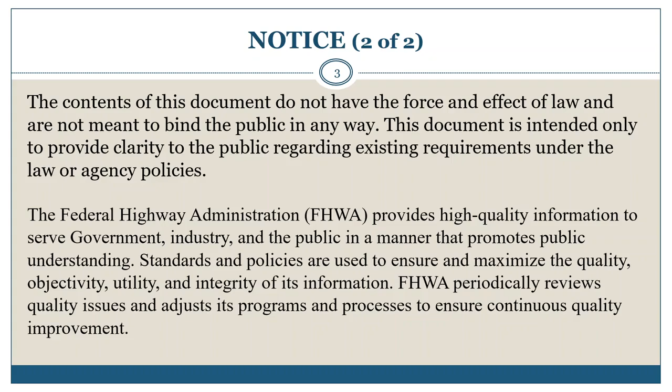The presentation is arranged into 5 sections. The first section is the introduction that will present basic information and definitions on SMA, which includes the background information on SMA mixtures. The second part is a summary of the advancements in design and construction of SMA mixtures, as well as a summary of the performance history of SMA mixtures from their inception into the U.S. The third part is a tie between SMA mixtures and the balanced mixture design process. The fourth part is a tie between SMA mixtures and structural pavement design via mechanistic-empirical design procedures. The fifth and final section is a summary of takeaways from the webinar itself.

Beginning with the introduction.

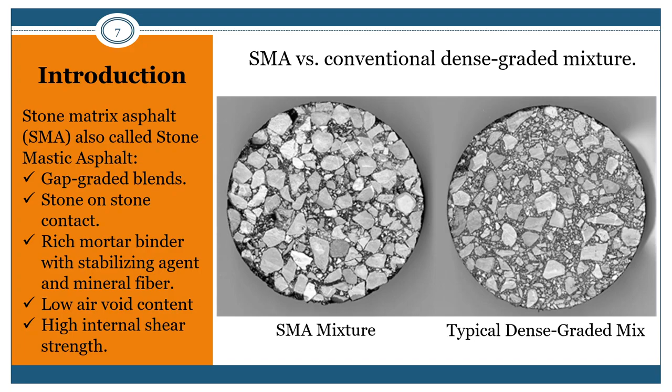SMA mixtures are comprised of 70 to 80% coarse aggregate, 8% to 12% filler, 6 to 7% asphalt binder, 0.3% cellulose, and 0.3 to 0.4% mineral fiber. The cellulose and mineral fiber prevents or reduces asphalt drain down. The higher asphalt content compared to conventional dense graded mixes increases the compliance of the mixture, reducing the probability for thermal cracking, and also increases the resistance to fatigue cracking.

Some use of polymers as stabilizing agents are also included in SMA mixtures, which also increases durability and increases the resistance to cracking and rutting.

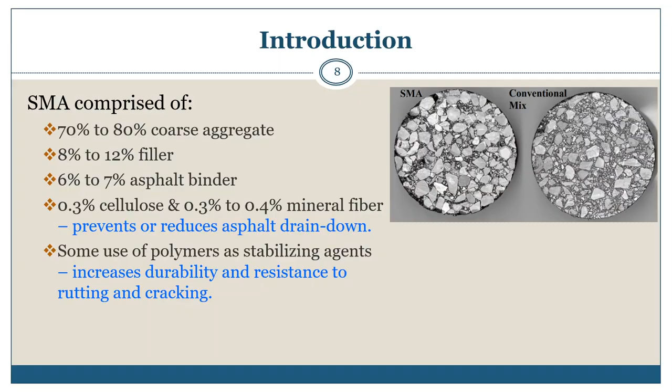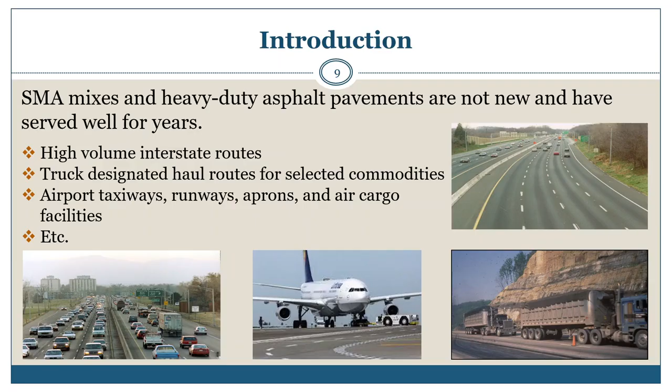SMA mixtures and heavy-duty asphalt pavements are not new and have served well for years. These heavy-duty asphalt pavements where SMA mixtures have been placed have exhibited excellent performance on high-volume interstate routes, truck-designated haul routes for selected commodities, and on various airfield facilities, including taxiways, runways, aprons, and air cargo facilities.

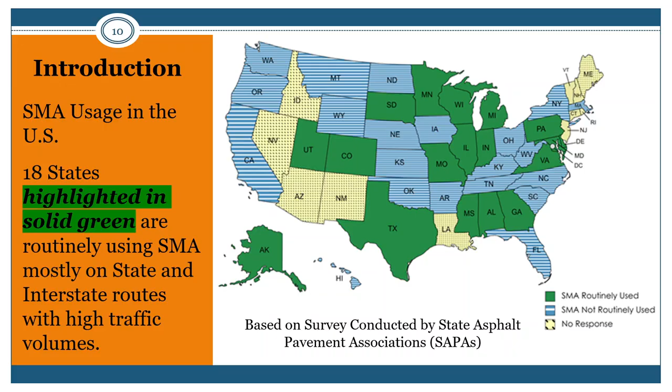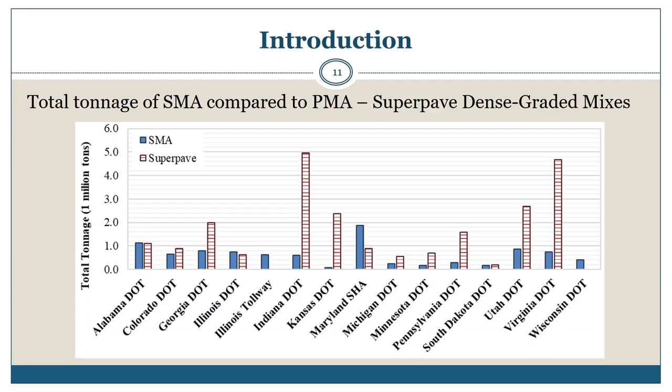SMA mixtures are only used for the wearing surface, while the superpave polymer modified dense graded mixtures can be used for other asphalt layers, so the tonnage is greater for the dense graded mixes in comparison to SMA mixtures. SMA mixtures are not typically used as a base mixture or as an intermediate asphalt layer; they're primarily used for wearing surfaces.

The other reported studies, not highlighted, show the superpave mixtures have slightly greater service lives, but it's not considered significantly longer. In fact, for those agencies reporting longer service life with superpave mixes, the average is slightly less than one more year of added service life.

Conversely, the average added service life for the other agencies that have reported higher service lives for SMA mixes is almost an average of 6 additional years of service life compared to the superpave mixes.

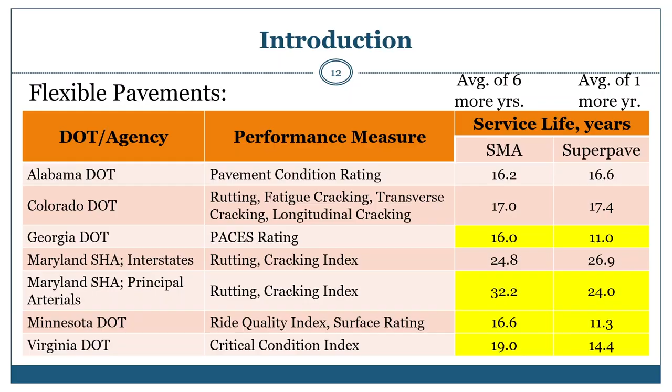Only one study, the Pennsylvania DOT on interstate pavements, reported a slightly longer service life for superpave dense graded mixes compared to SMA mixtures. However, it's an average of only slightly more than 1 year service life for the superpave mixes.

Conversely, the added service life reported by the 5 other agencies showed more than 6 additional years on average of higher or longer service lives for SMA mixtures compared to their superpave dense graded mixtures.

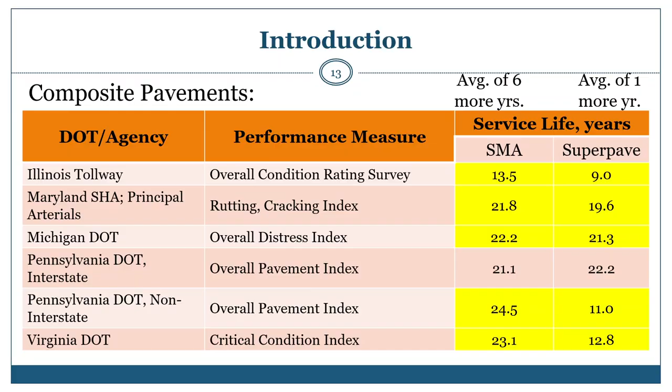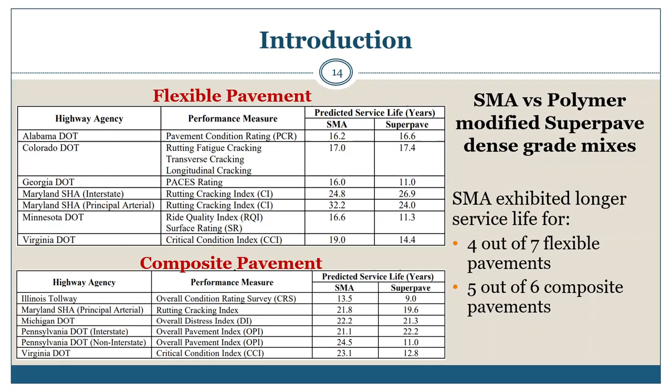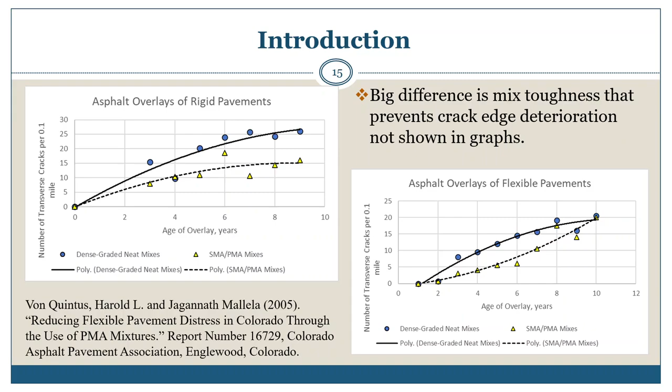In summary, there is a delay and/or lower number of transverse cracks in SMA overlays compared to conventional dense graded mixes. A more important observation, however, not illustrated in these 2 graphs, is the crack deterioration between SMA mixes and conventional dense graded mixes when cracks do occur. This crack deterioration difference between the 2 mixture types will be illustrated on the next slide.

SMA is considered a much tougher mixture, preventing crack edge deterioration. The observations on crack deterioration were taken from a study in both Colorado and Wisconsin, as well as other agencies by the presenter.

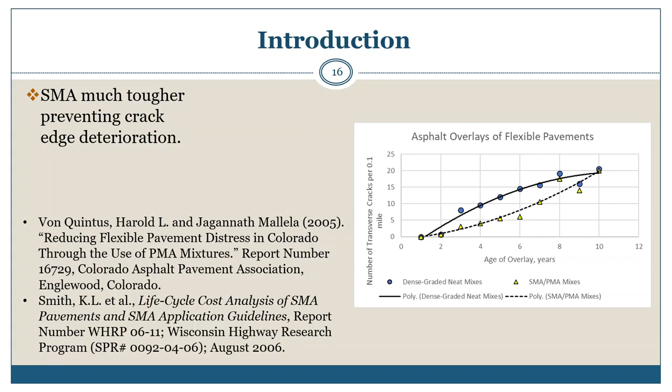The reports documented for these two studies are listed on this slide.

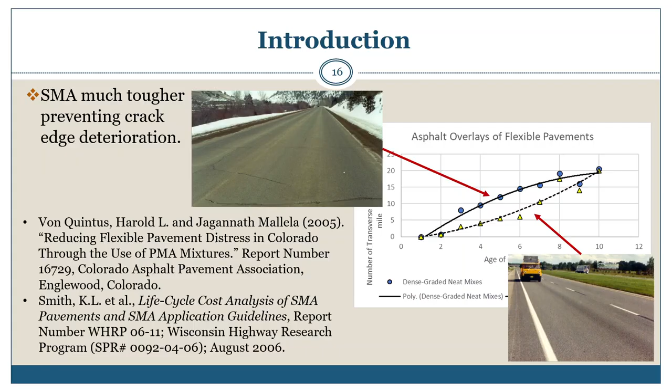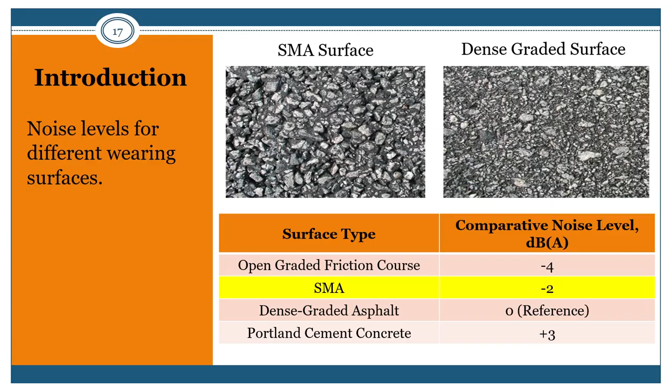compared to the macro surface texture of a dense graded surface itself. The macro surface texture is one of the reasons for the lower noise level in comparison to the dense graded asphalt surface.

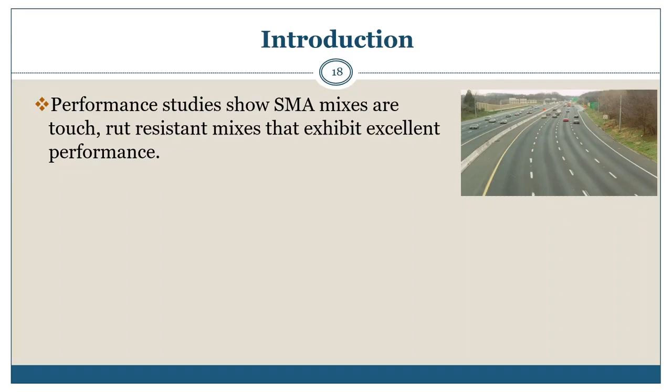Performance studies have shown SMA mixtures are tough and rut-resistant mixes that have exhibited excellent performance. So one of the questions that gets asked is, what are the reasons for this excellent or better performance, and how has it changed or improved over time?

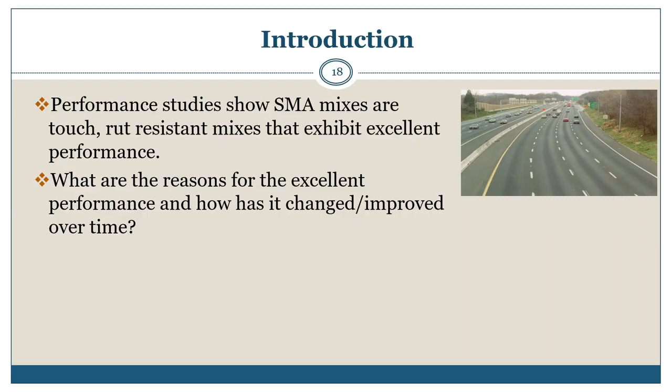Some reasons for the excellent performance of SMA mixtures include better material requirements, better mixture design requirements, more torture testing or mechanical testing requirements to measure the engineering properties of the SMA, as well as better production and construction requirements itself.

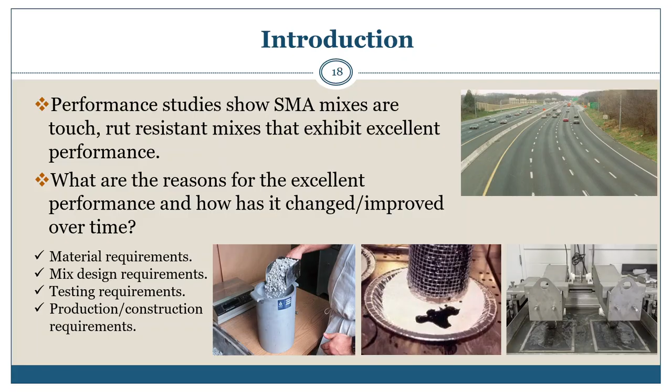In the presenter's opinion and observations from other performance studies, SMA mixtures consistently exhibit lower rut depths, less cracking—which includes predominantly top-down fatigue cracking and transverse cracks—and much less crack deterioration along the edges of the crack when they do occur. In fact, that is a very significant benefit of SMA mixtures for reducing crack deterioration as compared to conventional dense graded mixtures.

Now let's move to section 2, or the second part of the presentation, on looking at the advances that have been made in design and construction of SMA mixtures themselves.

This slide lists some of the publications and standard practices for the design and construction of SMA mixtures. AASHTO R46-08 and AASHTO M325-08 are the more common methods and specifications that have been used and are being used by many agencies for designing and placing SMA mixtures in the U.S.

AASHTO T305-14 is also a very important test method for determining the potential for drain down characteristics in uncompacted asphalt mixtures.

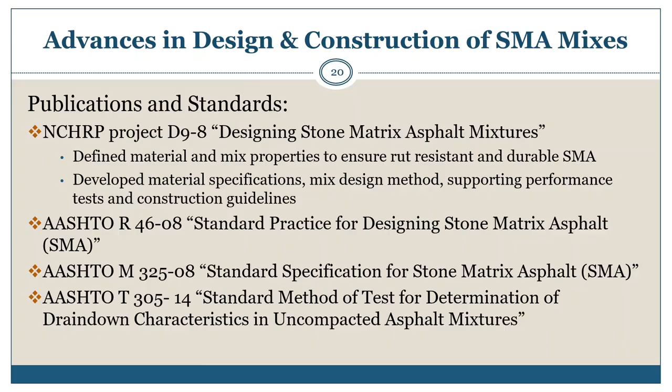As I mentioned earlier in the presentation, NAPA has an informational series referred to as Quality Improvement Series number 123 on the design and construction of heavy-duty pavements for high-stress applications. The second edition, published in August 2019, was prepared by both Harold Von Quintus and Charles Hughes.

In the NAPA publication, heavy-duty pavements are defined as pavements and asphalt mixtures supporting extreme loading conditions. Extreme loading conditions can consist of large wheel loads, high tire pressures, unique tire configurations, slow-moving or static loads, and/or an excessive number of loads going well beyond standard pavement and asphalt mixture design procedures.

The NAPA publication, Quality Improvement Series 123, can be downloaded from the website shown on this slide.

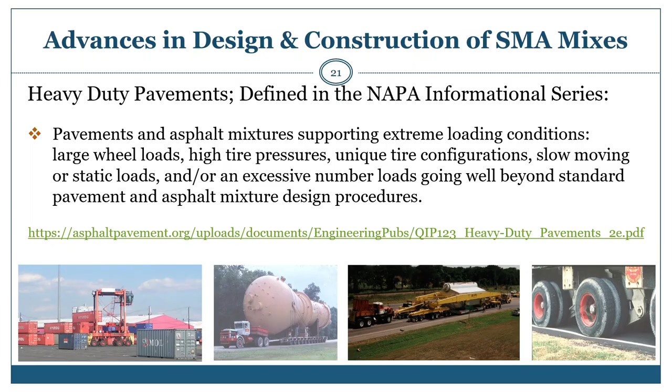This is a listing of some of the SMA mix design procedures being followed by selected agencies. Most agencies are following AASHTO R46-08.

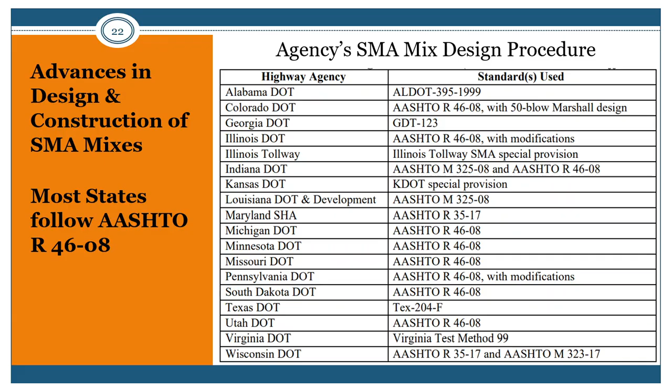This slide summarizes the selection criteria and policies for SMA mixture use for selected agencies as shown on the slide. The selection criteria and policies, however, do vary by agency.

SMA certainly is more expensive, simply because of the higher asphalt contents, the more durable aggregate requirements, and the inclusion of fibers and modified asphalt binder.

From different agencies, there is no consistent conclusion comparing cost effectiveness of SMA versus dense graded mixes. However, many agencies, but not all, have found SMA mixtures to be cost effective as compared to conventional dense graded mixes. The cost effectiveness issue will be discussed in greater detail in a later part of this presentation.

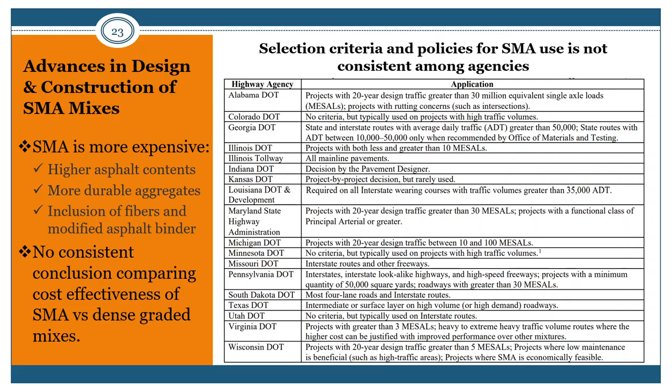This slide summarizes some of the unit bid prices, which affect the cost effectiveness of different mixes for SMA mixtures, in terms of the percent higher unit cost in comparison to conventional dense graded mixes for selected agencies.

The reason for the higher unit bid prices is related to the material requirements previously mentioned, as well as on this slide, and the amount of asphalt binder added to SMA mixtures.

Just about all agencies have reported that SMA mixtures are consistently higher in initial cost than conventional dense graded mixes because of higher binder contents, more durable aggregates, inclusion of fibers and polymers, limitations when using special aggregates in cold feed bins, and shortened paving windows due to traffic control itself.

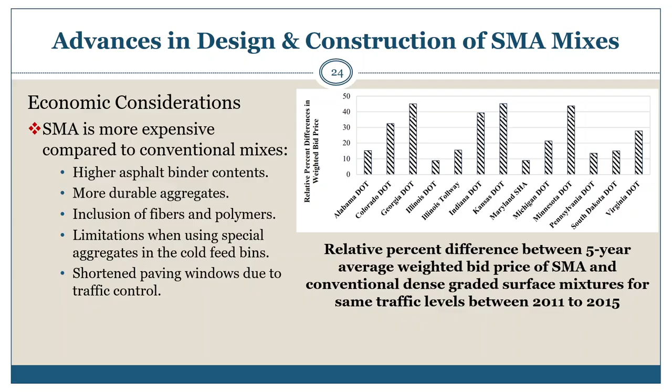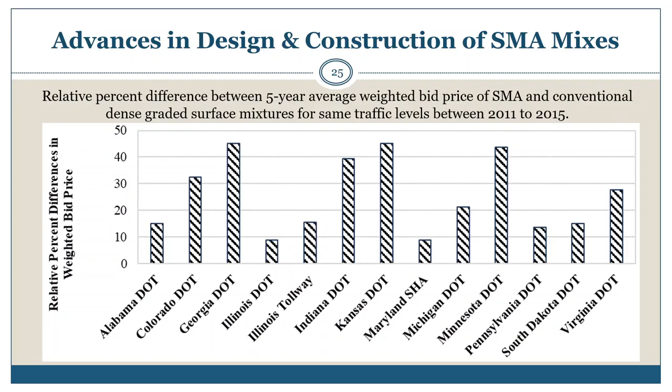Overall, the relative difference between the 5-year average weighted bid price of SMA and conventional dense graded mixes for the traffic level between 2011 and 2015 are shown in an expanded version in this slide from the previous slide.

Overall, SMA mixtures are about 25% higher in initial mixture cost in comparison to conventional dense graded asphalt mixtures.

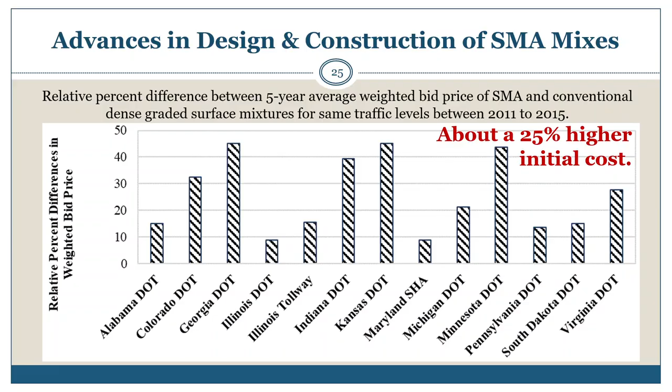So in terms of economic considerations, other factors also contribute or have been used to try to reduce the higher cost of SMA mixtures.

One typical and common feature or added material component to reduce the cost of SMA is to use reclaimed asphalt pavements (RAP) and/or reclaimed asphalt shingles (RAS) in the SMA mixtures itself. Other agencies do not permit RAP to be added to the SMA.

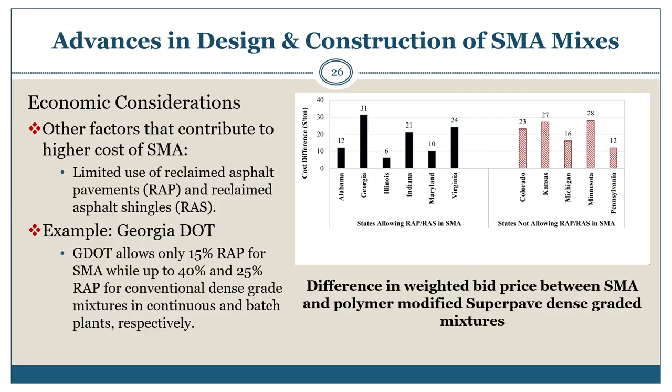This slide shows an expanded version of the bar graphs on the previous slide. Those agencies that do allow some percentage of RAP and RAS show a reduction in material cost in comparison to those agencies that do not allow RAP and RAS in SMA.

In general, for those states that do not allow RAP or RAS, the cost difference between SMA and dense graded mixes is about $21 per ton on average, in comparison to an increase of only $17 per ton on average for those states allowing RAP and RAS in SMA.

The important question to be asked is: will the RAP and/or RAS in the SMA have an impact and/or reduce the service life of the SMA mixtures, or reduce the difference in service life between SMA and the dense graded mixes presented earlier in this presentation?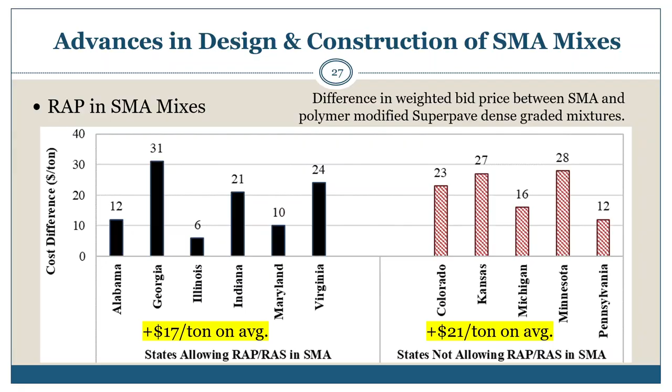This slide summarizes the findings from 3 agencies relative to the cost effectiveness of SMA mixtures in comparison to conventional dense graded mixes. As shown, 2 agencies have found SMA mixtures to be cost effective, while only 1 agency has not reported SMA to be cost effective.

The cost effectiveness is related back to the average service life difference between SMA and conventional dense graded mixes, which will be illustrated on the next slide.

Relative to this slide, SMA has a higher net present value for the Michigan DOT, but is not a cost-effective alternative. For Virginia and Maryland, the higher cost of SMA is justified by the greater pavement life extension, or higher service lives, in using SMA mixtures.

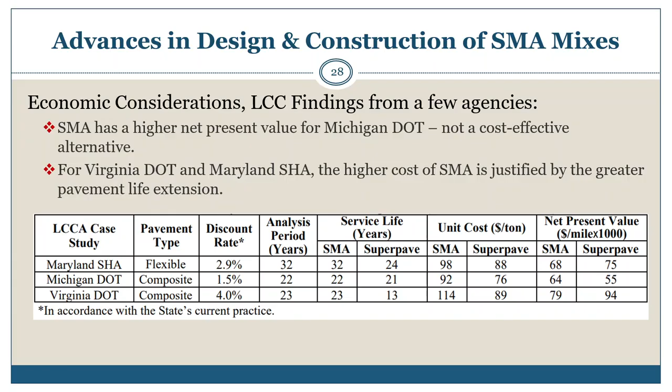This slide, as noted previously, includes information from the previous slide but in an expanded version. Many agencies, not just those listed here, show SMA has longer service lives but higher initial material cost. The cost effectiveness of SMA is heavily dependent on that difference in service life between SMA and Superpave, or conventional dense graded mixtures.

Maryland and Virginia have reported SMA to be cost effective, while Michigan has not found SMA to be cost effective in comparison to conventional dense graded mixes. The reason for that finding or observation comes back to the difference in service life.

The service life difference is shown in the first 2 columns for Maryland, Michigan, and Virginia. Michigan only reported a 1-year extended service life above dense graded mixes for the SMA mixtures. However, Maryland reported 8 additional years of service life, and Virginia has reported 10 additional years of service life for SMA mixtures.

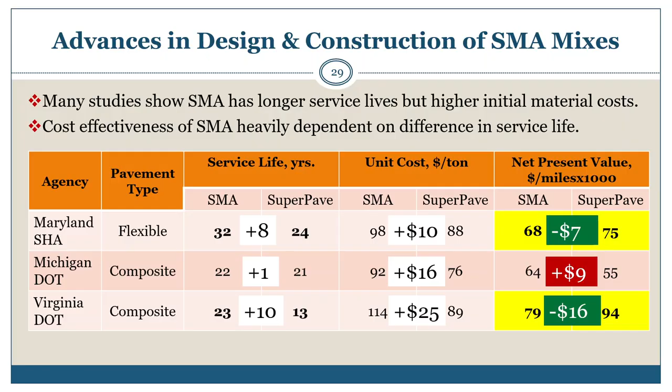A key question is, why the difference between the agencies? An answer to this question comes back to the definition of SMA mixtures, which will be discussed and answered in the following slides of this section. In other words, explaining why some agencies have found SMA not to be cost effective, at least a few agencies, as compared to many more agencies that have found SMA mixtures to be cost effective.

First, there is no question that SMA mixtures are much more resistant to plastic deformation because of their high internal friction resistance from the stone-on-stone contact of a gap-graded mix. This is illustrated in the figures or photographs shown in this slide.

The grooves sawed in SMA mixtures in the center photograph along a runway have held up significantly longer than grooves sawed in traditional dense graded mixes, shown in the photograph on the right as a close-up, even though the amount of asphalt is significantly higher in the SMA mixtures. The grooves remained intact for most of the time under heavy loads, while the grooves cut in the conventional dense graded wearing surface of runways collapsed over a shorter period of time. The reason for this, as previously noted, has to do with the internal strength of the SMA mixtures from stone-on-stone contact, resulting in very high internal frictional resistance.

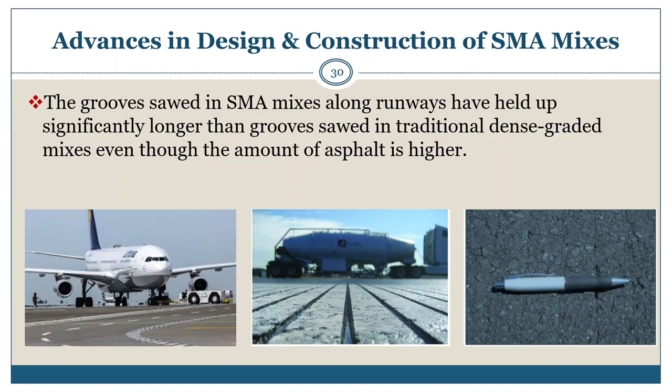In addition, there has been an NCAT research study on SMA performance. Some 86 SMA pavement projects have been monitored across various states over the short term and long term. Performance has been reported as good to excellent, with very few reported issues. SMA mixtures from the NCAT research study have outperformed standard dense graded asphalt mixes for both rutting and cracking resistance after being in service life for 2 to 6 years.

Additional studies have found that to be the case for over 10 years of performance. In fact, over 90% of the SMA projects had rut depth measurements less than 4 millimeters, or about 0.15 inches, and there was no evidence of raveling on the SMA projects. There have been some reported issues of fat spots due to segregation, low voids in the mineral aggregate, some drain down, and/or higher asphalt contents with SMA mixtures.

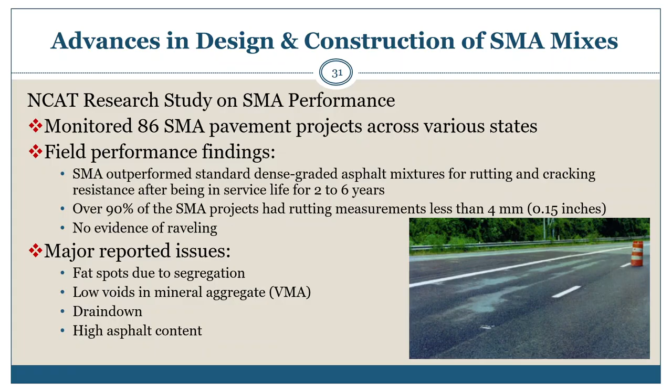Performance data has been collected on 19 SMA sections at the NCAT test track. Different aggregate sources have been used, but that had no significant impact on performance. The graph on the right shows red diamonds for IRI values in inches per mile measured over cumulative equivalent single axle loads, while the blue squares show the mean texture depth over that same time period. So roughness and mean texture depth measurements showed no change in surface characteristics throughout the 2-year testing cycle of different SMA mixtures that had been designed, constructed, and produced as SMA mixtures.

A notable example from the NCAT study was a section paved with a 12.5 millimeter nominal maximum aggregate size for an SMA mixture with granite aggregate and 28% flat and elongated particles at a 3:1 ratio. The findings on that section were that after more than 10 million equivalent single axle loads, less than 5 millimeters, or 0.19 inches, of rutting was observed, and there was no evidence of cracking on that section.

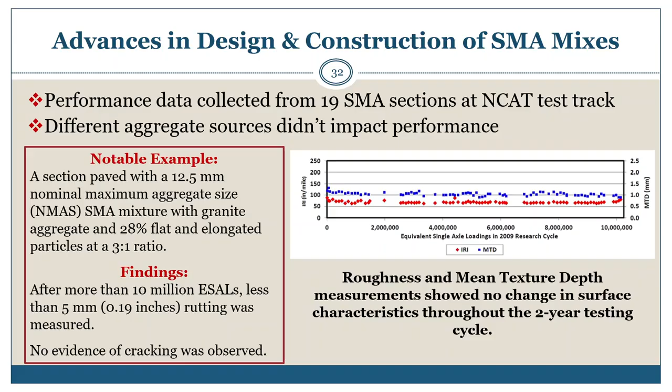SMA mixtures have performed well and resulted in cost-effective mixes. The question that always gets asked is how can we reduce the initial cost of SMA, or make them cheaper to be more cost-effective?

As an example, do we remove fibers, or can we remove fibers? Can we reduce the aggregate requirements? Can we reduce the asphalt content or other such requirements in SMA mixtures without having a significant impact on the service life and performance of those mixtures?

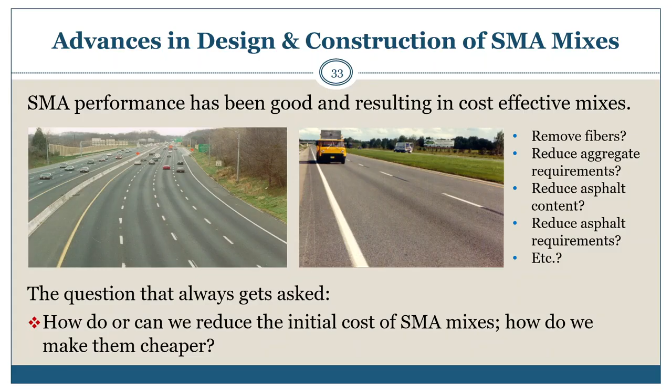There have been studies comparing projects between a standard SMA mixture and making reductions in asphalt content, removing fibers, removing the polymer modified asphalt on adjacent sections to determine the difference in performance and cost between projects defined as true SMA and other mixtures called SMA but not designed to the strict requirements mentioned earlier.

Fiberless SMA mixtures have been placed on two pilot projects in the U.S., including Route 1 in New Jersey. The finding was a reduction in production temperature to about 275 to 285 degrees Fahrenheit, which reduced drain down by not having fibers. There was also a reduction in oxidation from lower production temperatures, reducing the increase in stiffness and brittleness compared to mixtures produced at higher temperatures.

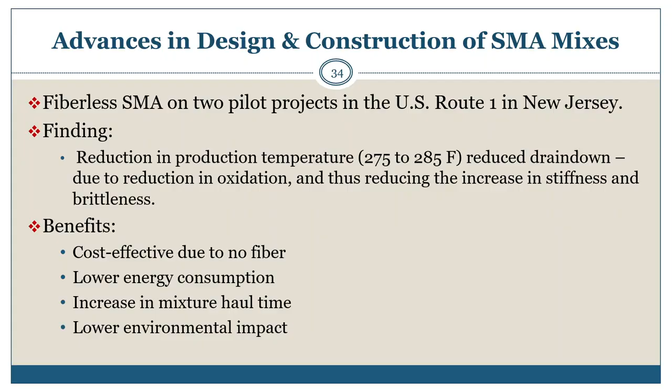Some benefits are cost-effectiveness due to no fiber, low energy consumption, increased haul time, and lower environmental impact. There has been positive short-term performance on some projects where SMA requirements have been reduced or minimized, but most long-term observations indicate a reduction in service life compared to SMA mixtures with stricter material requirements.

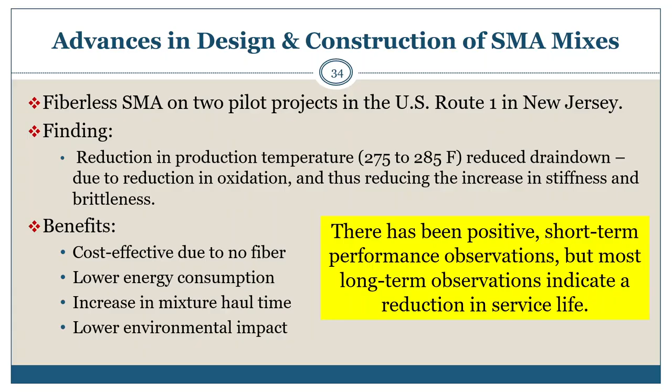Some of these mixtures have been called SMA but would not be categorized as such based on aggregate requirements, excluding fibers, and using lower asphalt contents. Further investigation of these SMA mixes found that they were SMA in name only, with no fibers or mineral filler, and no polymer modified mixes.

These mixes have exhibited lower service life, which is why some agencies have reported SMA mixtures to have a higher life cycle cost or not be cost effective compared to conventional dense graded mixes. One reason is the lower service life of these name-only SMA mixes that lack fibers, mineral filler, or polymer modified asphalt, and lack the higher asphalt contents found in true SMA mixes.

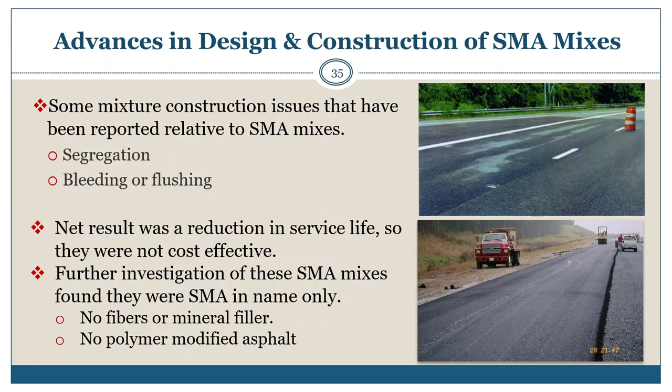So one needs to be careful in reporting studies of SMA mixes that are not found to be cost effective, to ensure those are really true SMA mixes with the same material requirements in the AASHTO mix design test standard.

Overall, in summary, SMA mixtures with the aggregate requirements, fibers, and higher asphalt contents as originally defined by the AASHTO standards and specifications have exhibited excellent performance and are cost effective. In other words, they exhibit lower life cycle cost compared to conventional dense graded mixes, even on high volume interstate routes, truck designated haul routes for selected commodities, and on airfield facilities such as taxiways, runways, aprons, and other air cargo facilities as mentioned earlier.

So SMA mixtures and heavy-duty asphalt pavements are not new, but have exhibited excellent performance and have served well for years.

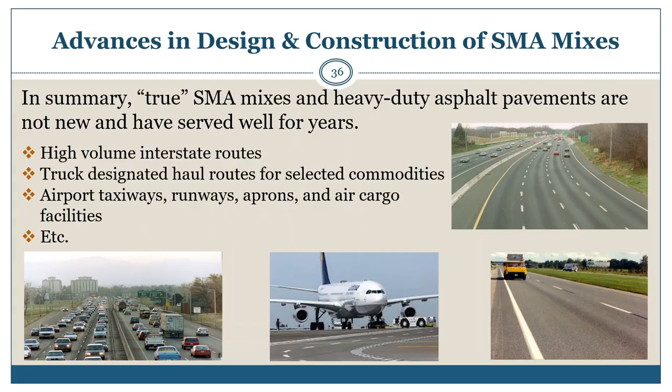Now starting section 3 on SMA mixtures and the balanced mixture design process. As per AASHTO PP 105-20, the balanced mixture design process is described as asphalt mixture design using performance tests on conditioned specimens that address multiple modes of distress by considering mix aging, traffic, climate, and location within the pavement structure. However, AASHTO PP 105-20 is a non-binding standard and not considered a federal requirement on federally funded roadways.

The balanced mixture design approach provides several benefits, such as enhanced quality and longevity, a stronger tie between design elements and field performance, mixes using more alternate and recycled materials, and industry innovation to meet performance goals. The AASHTO standard practice describes four approaches for the balanced mixture design method listed on this slide.

Approach A requires full compliance with the existing volumetric requirements, but with additional performance requirements, and is considered the most conservative approach. Approach B requires compliance with existing volumetric requirements at the preliminary optimum binder content, but allows moderate changes in asphalt binder content for performance optimization based on mixture performance test results.

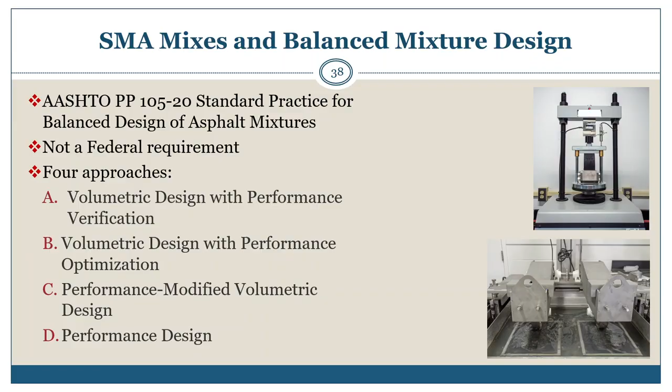Approach C allows some volumetric requirements to be relaxed or eliminated as long as performance criteria are satisfied; it is considered a less conservative approach. Approach D has no requirement on volumetric properties and relies solely on mixture performance test results for mix design optimization and determining the optimum binder content. It is also the least conservative approach among all the others.

The balanced mixture design method uses 3 types of tests, which are noted on this slide. Rutting tests, or distortion-based tests, are used to evaluate the susceptibility of asphalt mixture to plastic deformations, or deformations or displacements that are not recoverable under wheel loads and in the environment.

Cracking or fracture-based tests are used to evaluate the susceptibility of the asphalt mixture to cracking under wheel loads as well as under environmental loads. Moisture damage or durability tests are used to evaluate the susceptibility of the asphalt mixture to changes in its responses to water or moisture, which includes deformation and or fracture.

It is important to understand how material properties are measured and the importance of the testing conditions for understanding and using the test results themselves.

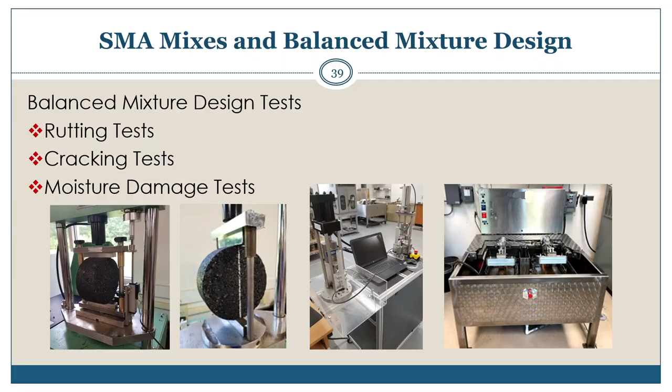For cracking, the flexibility index test, the semicircular bend test, and the overlay test were considered. For moisture damage, tensile strength, loaded wheel tester, and the Hamburg wheel tracking test are also considered. The Hamburg wheel tracking test and the loaded wheel test are also considered for rutting.

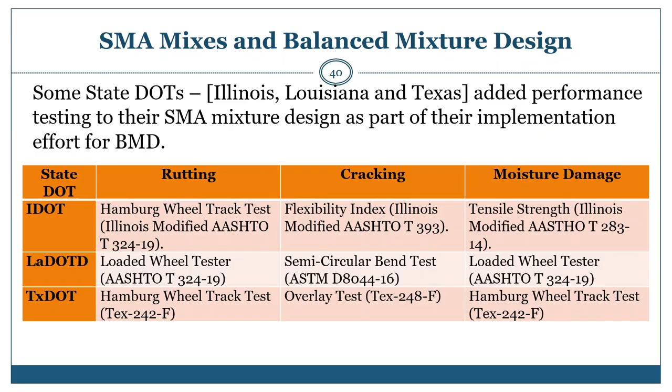Gap-graded aggregates are used to obtain uniform textures in exposed aggregate concrete, and close control of mixed proportions is necessary to avoid segregation. Because the aggregates are all in contact, rut resistance relies on aggregate properties rather than the asphalt binder properties to a large degree.

It refers to a sample that is approximately equal amounts of various sizes of aggregates. By having a dense gradation, most of the air voids between the materials or particles are filled with aggregate particles.

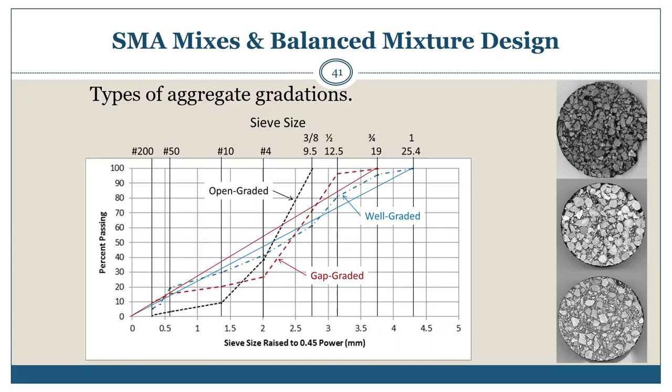SMA mixes are mostly placed as wearing surface courses on high-volume roadways. Based on test findings, it has been found that using SMA mixes as a wearing surface is beneficial over intermediate layers and base layers, resulting in higher stability, higher stiffness, higher density, higher relaxation, higher tensile strength, but lower permeability.

It was also observed that use of SMA mixes as a base layer will result in higher fatigue strength, but SMA mixes are typically not used in a base layer.

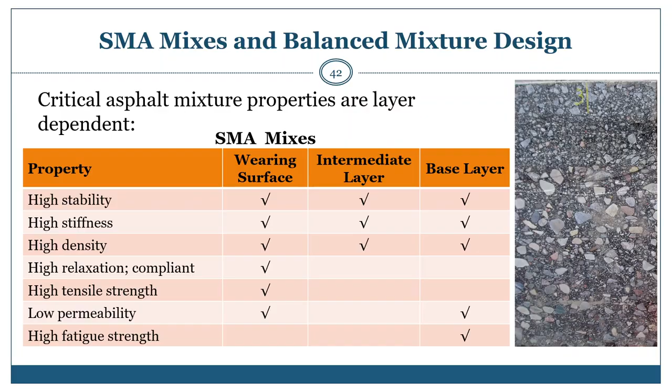Now let's move to section 4, which is on SMA and mechanistic empirical based design procedures.

Critical mixture properties measured in mechanistic empirical based structural design procedures are shown in this slide. Asphalt mixture properties include high stability and stiffness to resist deformations, high compliance or ability to withstand sustained wheel and thermal loads, higher strengths to resist or withstand cracking, higher fatigue resistance or the ability to bend without cracking on multiple cycles, or durability, the ability to withstand moisture damage.

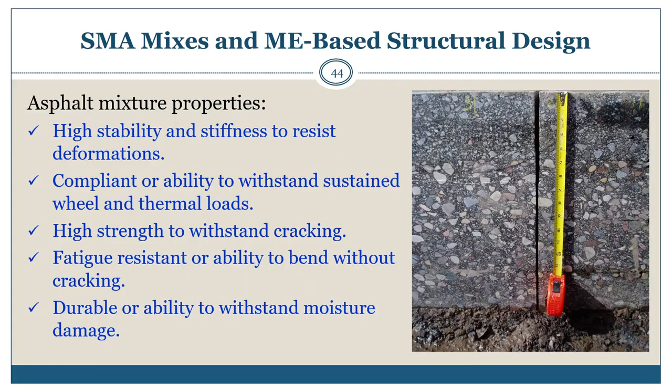In support of the use of mechanistic empirical based methods, some state Departments of Transportation, for example Colorado, Pennsylvania, Utah, and Wisconsin, have sponsored test programs to measure the asphalt properties of SMA mixtures.

Properties measured on SMA mixtures include dynamic modulus for predicting rutting and fatigue cracking, repeated load plastic strain for predicting rutting, indirect tensile creep compliance and strength for predicting low temperature or transverse cracking, and also top-down fatigue cracking. SMA is mainly placed on the wearing surface, so bottom-up fatigue cracks are not always applicable to SMA mixtures themselves.

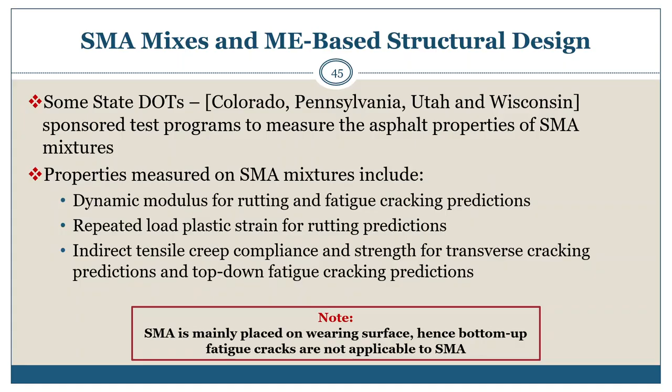Performance observations are needed to ensure that a mechanistic empirical based design method is predicting the distresses for the SMA and other asphalt mixtures without bias.

The distress observations made for flexible pavements confirm that SMA mixtures exhibit lower levels of rutting, lower levels of transverse cracking and crack deterioration, lower levels of top-down fatigue cracking, and hence have lower levels of IRI, or are smoother. Some examples of these observations come from data collected by one specific agency, the Pennsylvania Department of Transportation.

They reported the average rut depth of SMA was 0.37 inches compared to 0.4 inches for superpave mixes. Within that same study, the average alligator cracking of SMA mixes was 2.4% compared to 7% for superpave mixes, a significant reduction in alligator cracking.

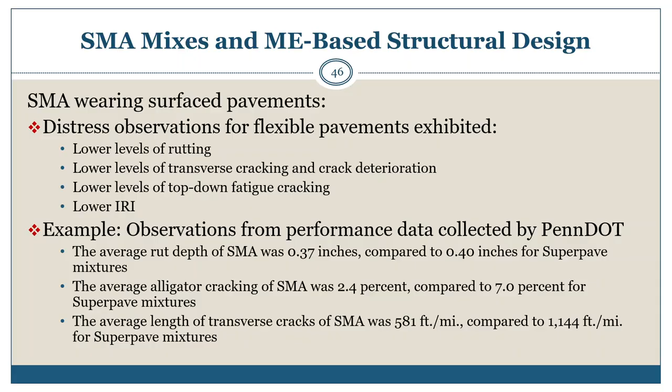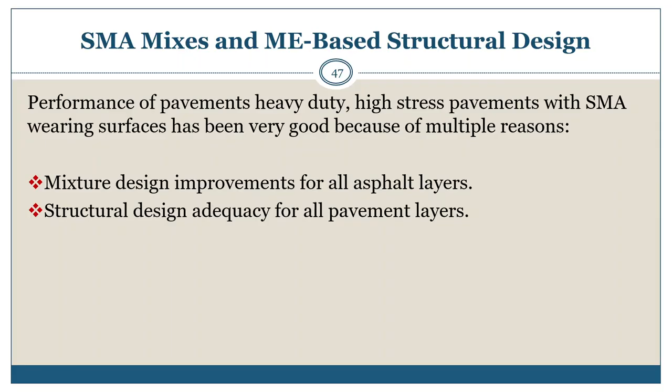Mixture design improvements for all asphalt layers and structural design adequacy for all pavement layers are the main reasons for improved pavement performance using SMA mixes on heavy volume pavements. There have been mixture design improvements for all layers, and structural design adequacy of all layers is a critical item to consider. Both have resulted in very good pavement performance where SMA mixtures have been used as wearing surfaces.

It should also be noted that SMA mixes should not be placed over a weak or inadequate structure and expect good or excellent performance. The pavement is a system, and all layers, including foundation layers, must be designed and constructed adequately. All can have a significant impact on pavement performance, and simply placing a tough, durable SMA mix over an inadequately placed aggregate base and/or subgrade will not ensure long-term performance.

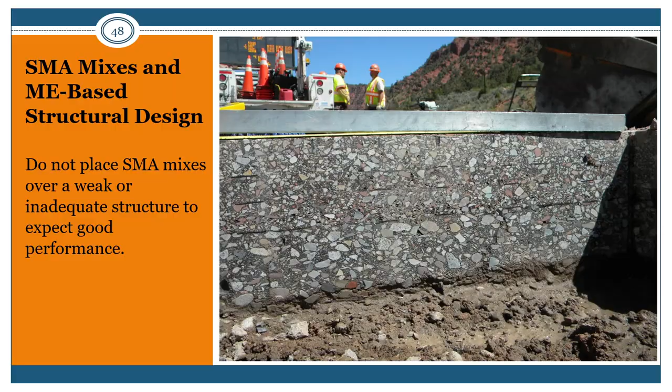Now, what are the reasons for differences in mixture properties between SMA and dense graded mixes? This can be due to differences in the test results observed for dynamic modulus, repeated load plastic deformation, indirect tensile creep compliance, and indirect tensile strength as required by mechanistic empirical design procedures.

In summary, dynamic modulus values for SMA mixtures can be higher or lower in comparison to conventional dense graded mixtures because the dynamic modulus is measured in accordance with the test procedure in an unconfined state. So the benefit of stone-on-stone contact, or the interparticle friction, is reduced because a test specimen is unconfined.

However, in reality, mixes are confined as placed on the roadway. So the interparticle friction of SMA mixes does become a benefit, and the stiffnesses are equal to or greater than the dense graded mixes, resulting in lower rut depths.

Repeated load plastic deformation values are lower than the values measured for conventional dense graded mixes because the test procedure includes confinement. So the test results exhibit the impact of higher internal friction of SMA mixtures, in other words more resistant to plastic deformation, which means lower rutting.

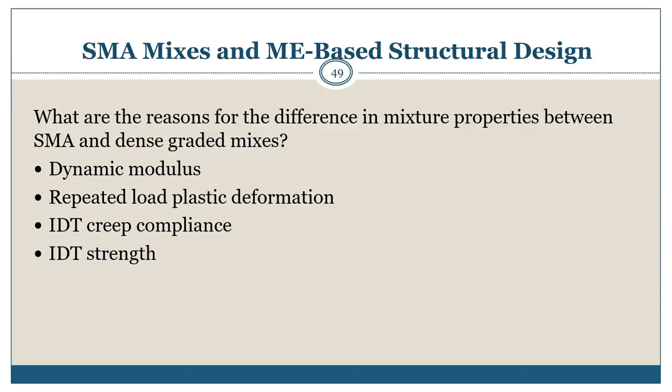Again, dynamic modulus values for SMA mixes can be higher or lower in comparison to conventional dense graded mixes because the dynamic modulus test is unconfined. For this example, the dynamic modulus values for the SMA mixes are slightly lower than for the conventional dense graded polymer modified warm mix asphalt.

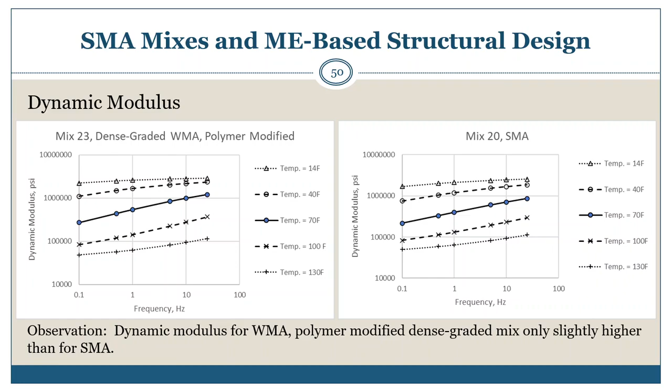SMA mixtures generally have higher compliance than conventional dense graded mixtures, but also have a lower indirect tensile strength measured at 14 degrees Fahrenheit. Specifically, the indirect tensile creep compliance values for SMA mixes generally exhibit more compliance because of the higher asphalt binder content and use of fibers.

Higher compliance means mixes are more resistant to thermal fracture. Indirect tensile strengths of SMA mixes are generally lower than for conventional dense graded mixes because of the higher asphalt contents. The creep compliance values, however, generally control the resistance to thermal fracture and are more important than the indirect tensile strength.

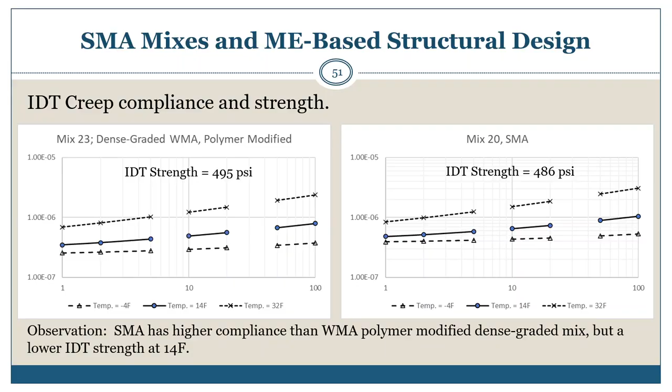Repeated load plastic deformation values are lower in general than the values measured for conventional dense graded mixes because this test does have confinement. So the test results exhibit the impact of higher internal friction of SMA mixtures. In other words, they're more resistant to plastic deformation, resulting in lower rut depths.

The lower KR1 value, or the larger the negative value from the repeated load plastic strain test, means more resistance to deformation or rutting in the early life of the wearing surface. The lower KR2 value, the less sensitive the mix is to plastic deformation as a function of temperature. Higher KR2 values generally exhibit higher rut depths, everything being equal, which it is not.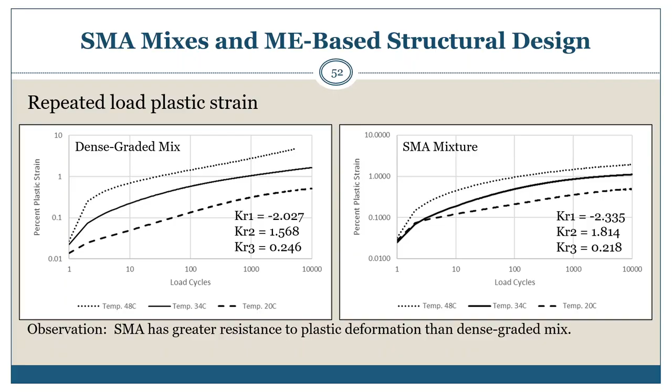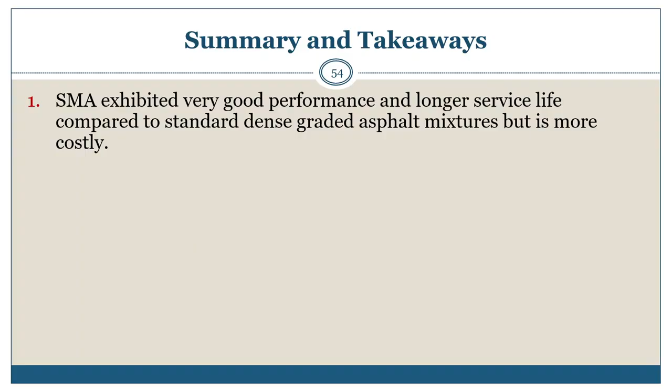So in summary, this is section 5, a summary of the takeaways in terms of the final discussion. SMA mixes exhibited very good performance and longer service life compared to standard dense graded asphalt mixes, but it is more costly. Many studies have shown that SMA mixes have much longer, or significantly longer, service lives.

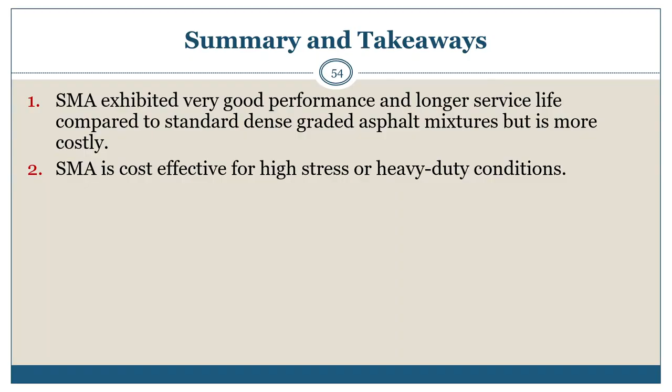SMA mixes, however, are cost effective, even with the higher initial cost, for high stress and heavy duty conditions. The reason for the cost effectiveness is the longer service life, even though the initial cost of the mix is higher. The use of RAP can reduce the initial cost of SMA without significantly reducing the service life.

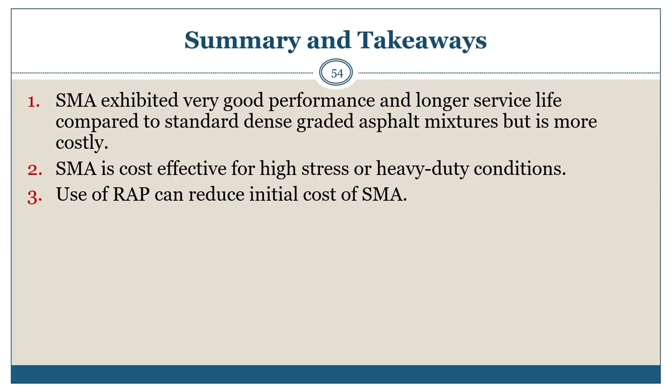As long as the properties of the SMA have been adequately measured, similar to the balanced mixture design method or approach, it is important to recognize that the aggregate specifications for SMA can be restrictive based on past studies and performance observations, but those restrictions have been found to be cost effective.

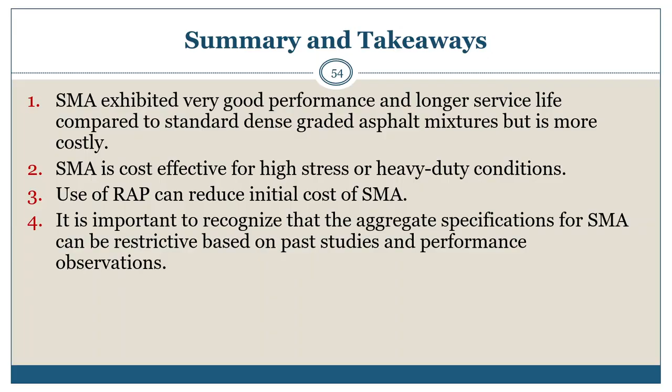If the aggregate properties become less restrictive, more local materials can be used, thus reducing the initial material cost, but also generally resulting in a reduced service life of the SMA.

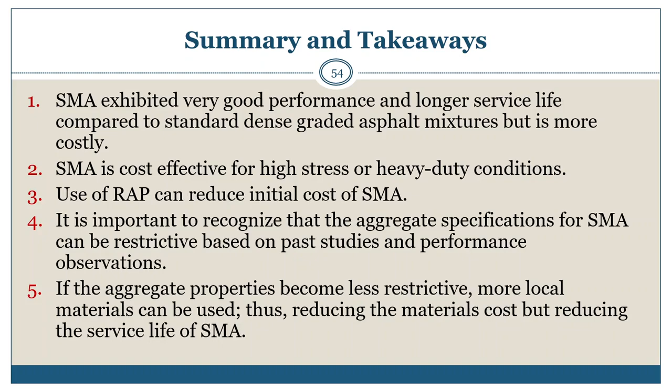The most important one of the takeaways shown on this slide is that SMA does provide, and has provided, excellent performance and longer service life in comparison to conventional dense graded mixes, and is cost effective, even under very high stress heavy duty conditions.

Continuing with the takeaways, the aggregate properties or aggregate specifications for SMA should not be reduced unless the engineering properties of the SMA are measured to ensure the minimum properties and expected design life are being satisfied.

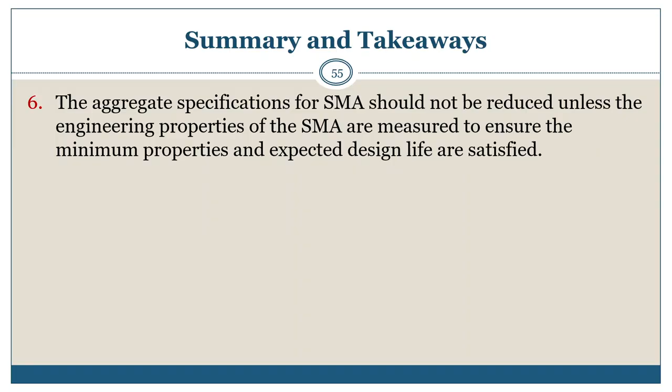The use of SMA mixtures will not improve performance on an inadequate structure for different site condition features. In other words, the lower layers need to be adequate in terms of design and construction for the site feature conditions. In summary, SMA has exhibited excellent performance when designed in accordance with SMA specifications.

The most important takeaway on this slide is that if you decide to reduce the aggregate requirement so that local aggregates can be used, make sure the performance tests are run to confirm the mixture is still resistant to deformation and fracture.

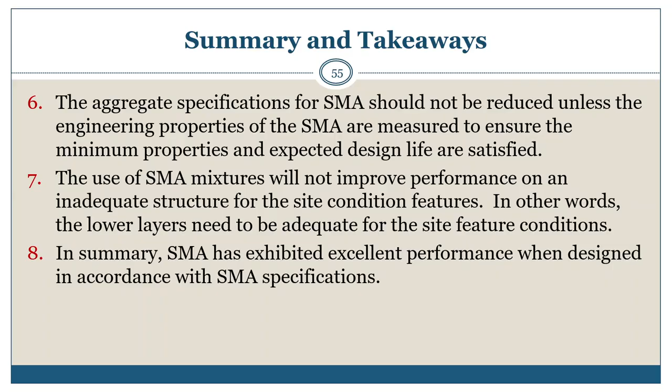We simply do not recommend reducing the aggregate requirement so local aggregates can be used and/or not using fibers or other mineral filler, with only using volumetric testing and not including any of the performance tests in making a decision on the SMA mixture design.